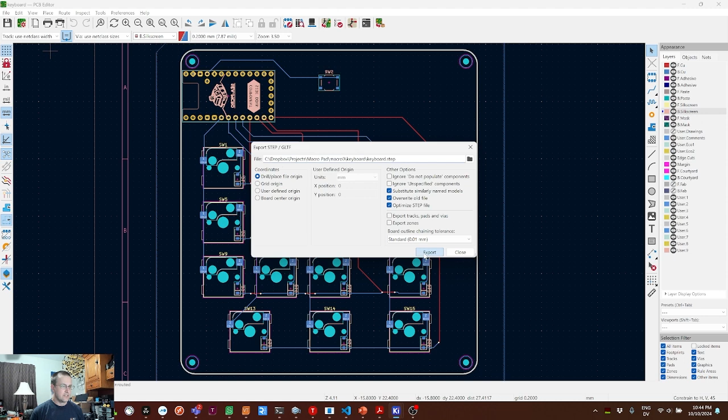Since I'm assuming no prior experience with CAD, I'm going to be using a free CAD software called Onshape, which you can find linked from the resource page. Go over to Onshape, sign up for a new account if you don't have one, and you can get started for free, and you can continue for free as long as you have a public account. The public account is really the only restriction.

Anything that you design using Onshape, anybody else has access to. It doesn't really make a big difference to me. Obviously, if you're working for a company, you probably want to get them to pay for Onshape. But the free account, I'm very happy with this as a hobbyist.

Once you have your account set up, we're going to go to Create Document. I'll give it a name like YouTube MacroPad. Now, I think the first time you do this, it will ask about your preferences, and you'll have to set units and things like that. We'll be working in millimeters here.

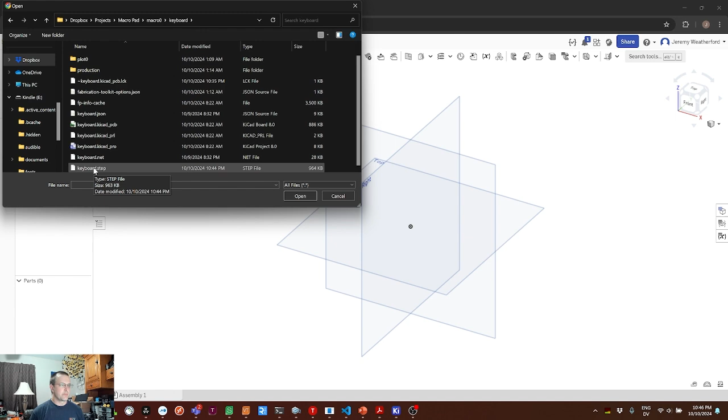It opens us up in a tab. We look down here at the bottom, called Part Studio 1. There's also an assembly tab over here. We don't want either of those. We want a new tab because we're going to bring in the step file that we have from KiCad. So click the plus sign, click on Import, and then we'll find our keyboard folder and find keyboard.step. We'll click that. Don't hit import yet though.

If you import this as is, Onshape will helpfully add a tab for each diode on your board because they each have 3D models. We want to combine these to a single part studio. So make sure you click on that and then hit import. This can actually take a minute. It'll show you the progress over here. But once it's done, it'll add a tab down here at the bottom named keyboard, which is the name of our step file. And there it is.

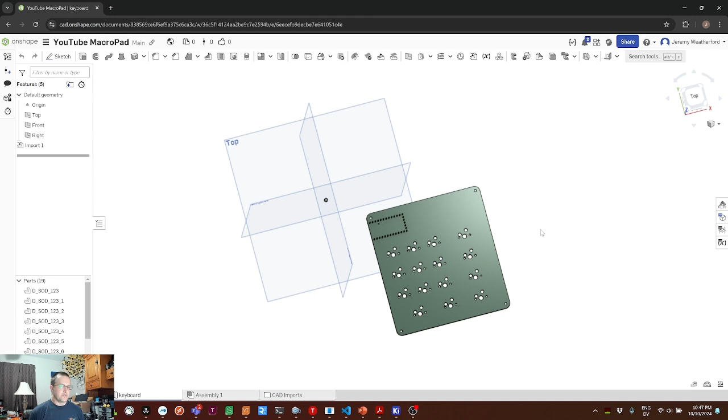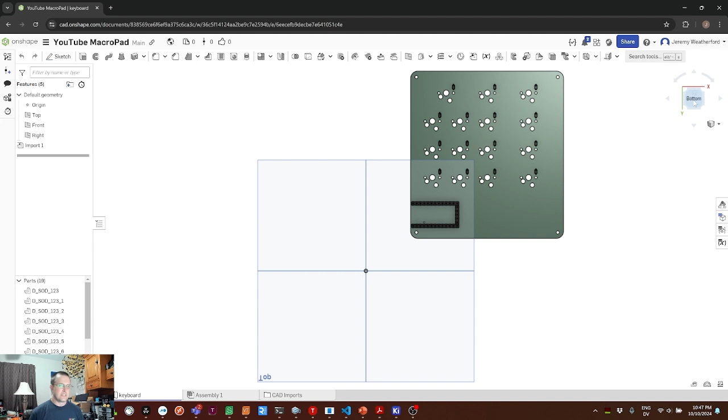This should look a lot like the 3D view in KiCad, except it doesn't bring the silk screen over. That's all right. We're just interested in the shape. As you're looking at it, you can hold the right mouse button to rotate. You hit the F key to fit the view to everything on screen. You can also use this little cube here. You can click on the top to orient to that face. You can click to orient to another face, or if you click here, it'll flip around to the other side.

So this will be the foundation for our top and bottom plate designs. Let's talk in detail about what we're going to build. And in fact, we're going to use Onshape to draw a side view of the parts we need in a little sketch. So let's come back over to Part Studio 1 for now. You right-click and rename this tab to StackUp, because that's exactly what we want to look at.

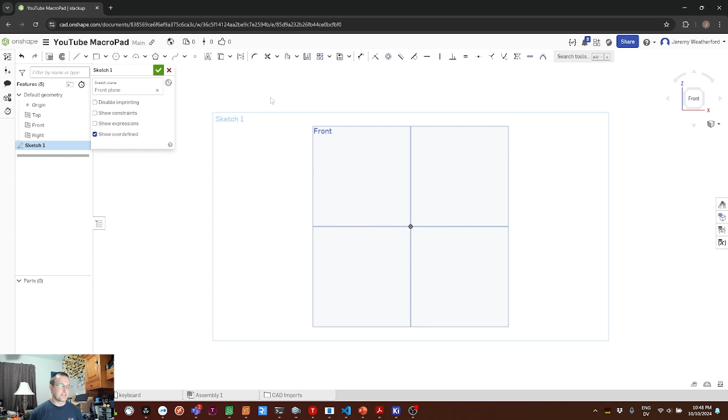Up here at the top, we want to create a new sketch, and we'll create it on the front plane, since this is a side view. And we can see the rectangle it draws here is sketch 1. We can hit N to bring us to a normal view to that sketch. Also going to hit the P key to hide the planes, because we don't really need those right now. We'll start with a rectangle to represent our PCB in the middle of the stack up.

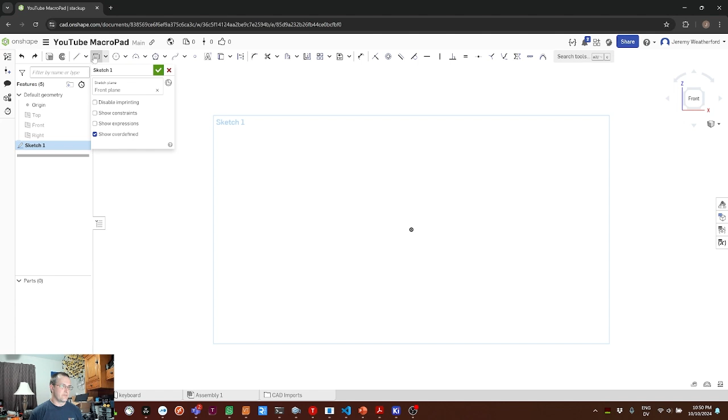Up here in the drawing tools, we have lines, rectangles. We're going to draw a rectangle defined by 2 corners. One of them is going to be the origin, so we'll click on that. And we'll drag out to the right here to make something like that. Doesn't really matter because we're going to specify the dimensions numerically. Our PCB is about 100 millimeters wide. We don't care exactly for this sketch.

And it is exactly 1.6 millimeters tall. I know that because that's the size PCB that we ordered from JLC PCB. You hit escape to unselect the rectangle. The normal cursor can be used to just click and drag these dimensions to wherever you want, or you can double click one to change it.

We're also going to draw another rectangle. We'll use G for corner rectangle. We'll draw this to represent our top plate. Mouse wheel to zoom in, click the middle mouse button to move the view. If you accidentally rotate it, you can hit N again to get back to normal or straight on view. This will be the top plate, so it'll be somewhere above the PCB.

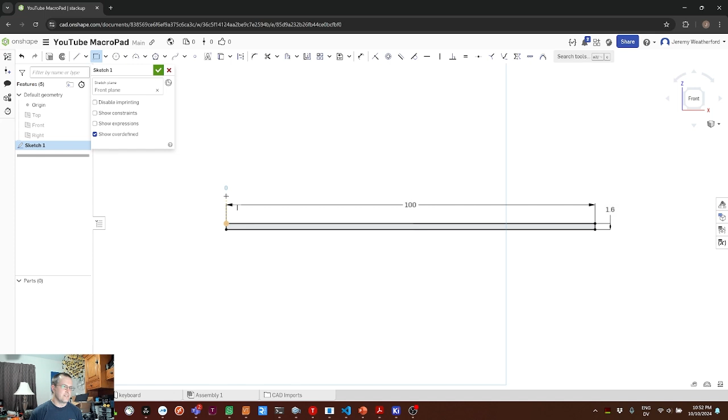If we hover over this line and drag up, we see a little dashed line that says we want to constrain it here. That'll work. And we'll drag over to somewhere around here and type in the dimensions. If the dimension you want isn't highlighted, move your mouse over to the other one, and you can type in whichever one you want first. This is going to be 100 millimeters wide, and the height is going to be exactly 3 millimeters.

Why 3 millimeters? That's the thickness of the material that I'm using. So laser cut acrylic or plywood, that's a common thickness. 3D print this in PLA, I think that'll work pretty well. This is 3 millimeters for our top plate. Now we have a space between our top plate and our PCB. How do we know how much space to leave? Well, that's going to be determined by the key switches. Our key switches are going to snap into the top plate and plug into the PCB.

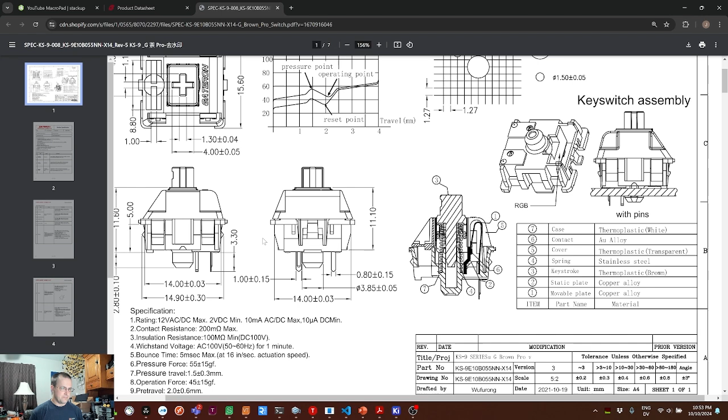So let's pull up the data sheet for our Gateron key switches. If we go back to the resource page, down here under reference information, we have a Gateron product data sheet. And these measurements are the same for pretty much any MX key switch. But as an example, we have the Gateron key switches up. And they show a couple of critical dimensions here.

The main one we're interested in is the distance from under this flange right here to the bottom of the switch where it sits on the PCB. 5 millimeters. This part here sticks through the PCB. We've already seen the hole where that's going to go, and those are the pins. But 5 millimeters between the top of the top plate, we're talking about up here, and the top of the PCB.

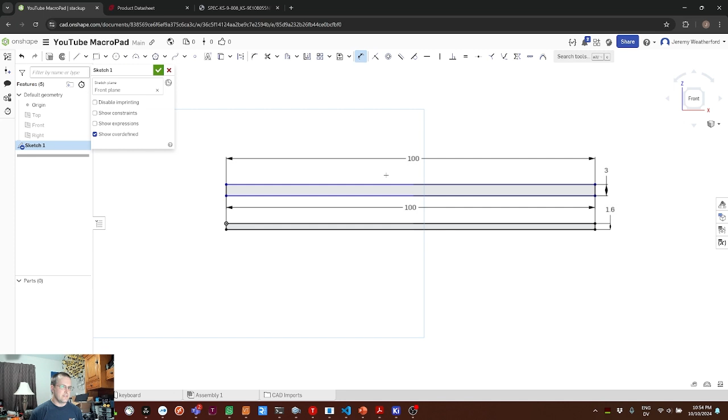To tell Onshape that we want that dimension exactly, we'll use the dimension tool, which is here, or just hit D, and we'll click the top line here, and click the top line here, and then move our mouse somewhere convenient, click again to set the dimension, we'll type 5 millimeters. 5 millimeters is going to be the amount of space between this plate and this plate. So with our material dimension at 3, we don't have to actually calculate what the spacing is. Onshape will save us that headache.

We click here, we can set another dimension. Drag over here, click. And instead of specifying it, we're just going to hit escape. So this is an informational dimension, right? 2 millimeter gap between here and here. So that's going to be the size of the spacers that we need to keep the top plate spacing correct from the PCB. We can actually draw a spacer in, hit G again for corner rectangle.

We can click here on this top line and here on this bottom line. Spacers I found on Amazon are about 7 millimeters in width. That doesn't strictly matter. And our height is already specified, so that's fine. These two lines are blue, by the way, because they're not constrained. We haven't given it a dimension for where the spacer goes in this vicinity, right? We know it's attached to these two lines, we know its width, but we don't know where it's going to be, so we can still drag it around.

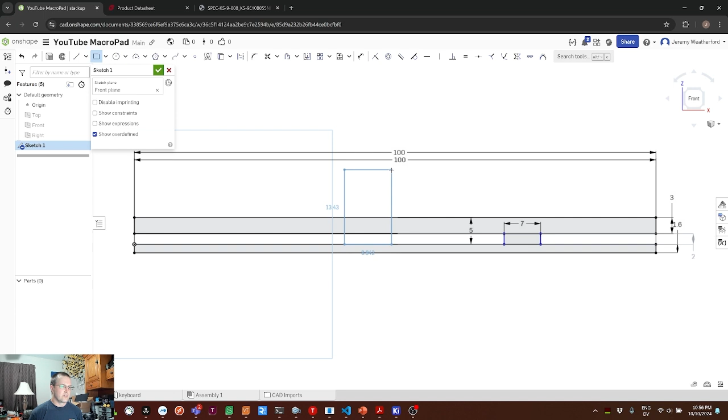So back to here, we'll draw a rectangle from the top of our PCB up through the top plate. And we'll make it about 19.

And look at the data sheet. It's about 15 millimeters wide. So we'll go 15 here, 19 here, and that'll represent our key switch sitting on the PCB through the top plate.

Let's draw in our bottom plate. Yet another rectangle. We're going to make it vertical from the origin here. And draw out something like that. We'll give it 100 millimeters wide. And we'll type 3 again for the thickness. We can create a variable for that, by the way. I'll show you how to do that a little bit later. We'll just go ahead and specify that as 3.

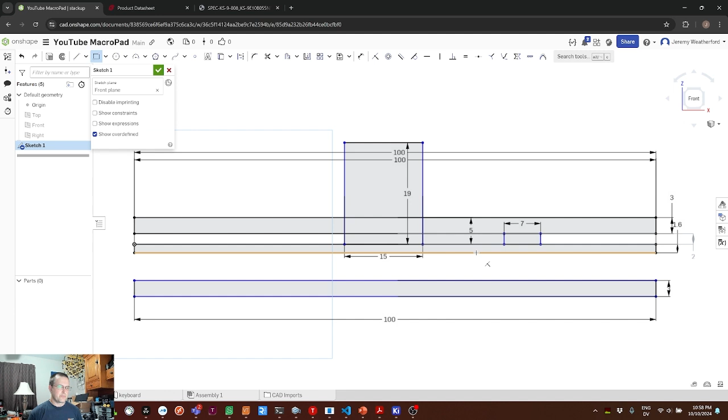We need to figure out how much space we want to leave under the PCB. We have the controller mounted down there, and if you measure the header pins, it's about 9 millimeters from where they sit on the PCB to the end of the header pin. With the board mounted component side down, the header pins are the tallest thing there. We're going to draw a rectangle to represent that space. We'll start it connected here, and connected here. And we'll give it a height of 10 millimeters to clear that.

So Onshape helpfully pushes this rectangle down to accommodate the constrained dimension here. And again, this one can slide around. We don't actually care. We're going to line it up with our spacer over here, because this actually represents a standoff. Right? These are the brass standoffs that we're going to use. You can see that there are a couple of different lengths available here, 9, 10, 11, 12, etc. These are all commonly available threaded brass standoff sizes.

All right, holding our whole stack up together is going to be a couple of M2 screws. I like the M2 hardware because it's nice and small. I like these little laptop screws with a tiny little head, so you don't have to worry about them interfering with the key switches, even if you don't countersink anything.

Instead of a rectangle for the screw, we're going to draw a line. L for line. We'll start it on the top line of this plate and drag down somewhere into our spacer. It looks like the screw could be anywhere from about 9 or 10 millimeters to, I don't know, 14 or so. So I'll drag one there, hit escape. I'll drag another one from the bottom plate up to here.

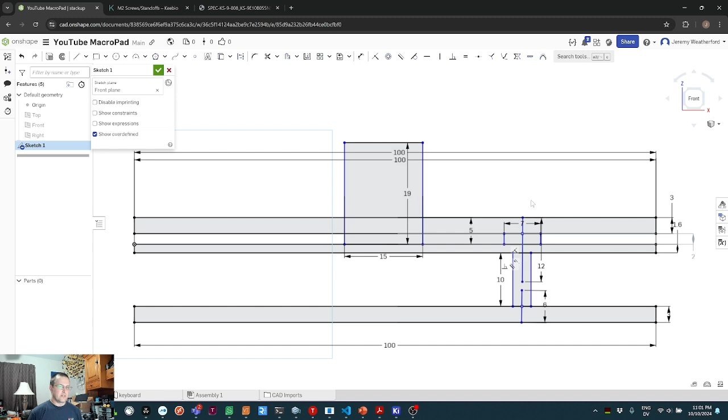Last thing I want to do with this sketch is figure out how tall our walls are going to be. I like having the top plate a little bit wider, so it can have nice rounded edges, even if it's a laser cut sheet, and then have the walls come up to meet it. So we'll draw another corner rectangle, hit G for corner. We'll connect it to this corner of the bottom plate, and drag it up to connect it to the bottom of the top plate. We'll set the width here to be our material thickness, which is 3.

And we don't want to set a dimension for the height. If we do, even if we just hit enter here, we're going to set off the red alert of over-constrained. Right? Everything turns red, all the constraints that are in conflict, and Onshape says sketch could not be solved. So that means you did something wrong. You can go in and delete constraints individually, but usually the easiest thing is to hit Control-Z. And in this case, that keeps our rectangle, but deletes the constraint that we were trying to set, which is fine.

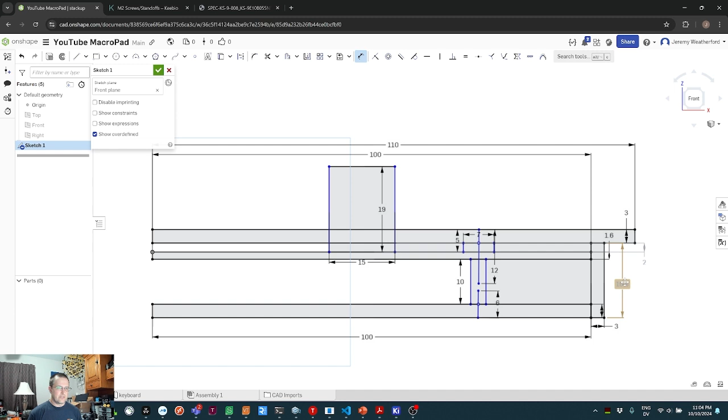If we want to see how tall this wall is going to be, hit D, click on the line, click to place the dimension, but don't hit Enter, hit Escape. Again, that's going to make this grayed out informational dimension.

If anything changes in our stack-up, like if we want 12 millimeter spacers here, our informational dimensions will change accordingly. I like 10 millimeters, that's enough room for the Sea-Picro. So that means our walls are going to be 16.6 millimeters to go from the bottom plate to just under the top plate. If you're tired of typing in the 3 for material thickness, by the way, there are other ways to set that. You can set up equal constraints to set all the dimensions equal, or you can use variables, which we'll talk about when we get to the plates.

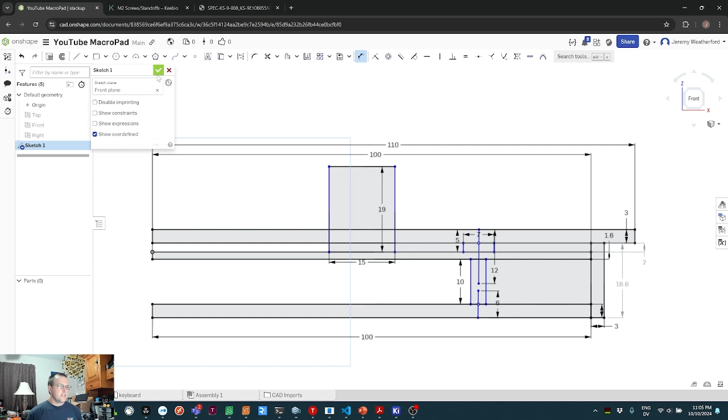Hit the green check to say that we're done with the sketch. If you wanted to edit it again, you can double-click it here in the list. And if the view is messed up, you can always hit N to come back to normal, or click on the face on the cube here. We're done with this Part Studio, though. Let's create a new Part Studio. Right here, plus, create Part Studio. And we'll right-click to rename this one as Case. We'll use this to design the top plate, bottom plate, and the side walls.

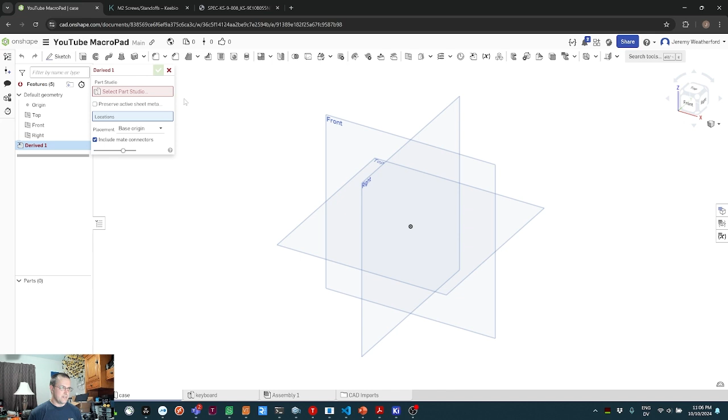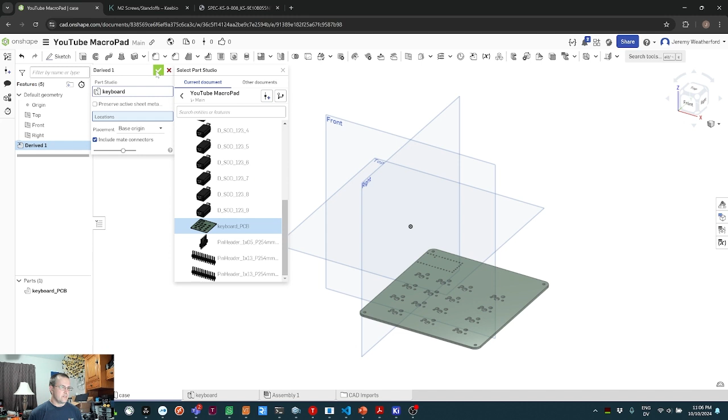Remember that PCB we imported? Now it's time to actually make use of it. Up here in the toolbar, there's an item for derived part. I'll give you a minute to find it, or you can click here and search for it. We want a derived part to bring it in from another Part Studio. And click Select Part Studio, and we want the keyboard PCB that we had earlier. So we'll click on that, and it gives us a list of options. We don't want any of the diodes, we just want the keyboard PCB. We'll click on that, and then the green check mark to commit this operation. And our PCB suddenly exists in our 3D space here.

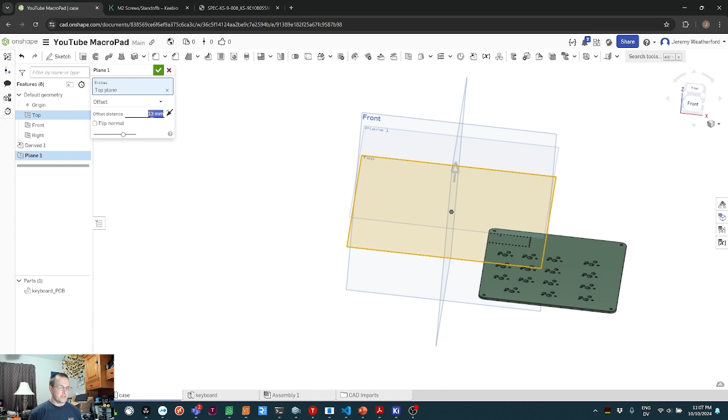The bottom of the PCB is currently sitting on the top plane. If you look at it right there, you can see that. We're going to be designing our bottom plate first, and we want it to be based on an offset plane. So we'll go to plane here to create a new one. We'll click on the top plane. That's the entity to base it on, and then set this to offset. We want it to be 10 millimeters lower, and then the material thickness is 3, so we'll go 13 millimeters lower. And if we look at our layout here, we see it actually went higher. So we'll click this arrow to flip it to the opposite direction. We go down below the circuit board. Perfect. Next to the green check, there's a little pencil icon. We can click on that and say bottom plane. And hit the green check mark.

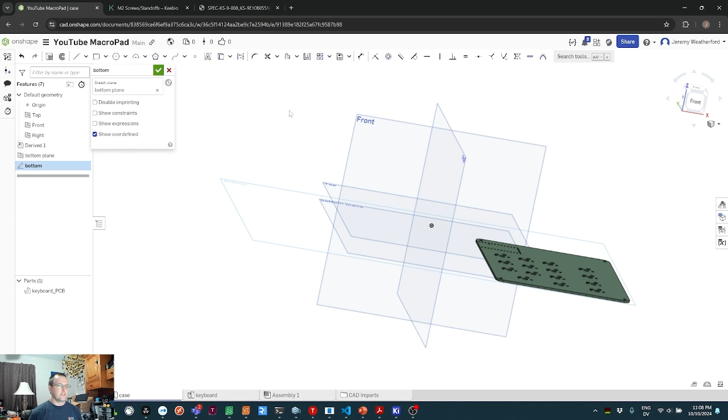Now we can create a sketch on it. Clicking the sketch button here. We'll select our bottom plane in the features list. Clicking that here. And we'll give it a name of bottom. Hit N to come back to normal. We'll hit P to get rid of the planes because we don't actually need those. Middle click drag to bring our PCB over. And we can start designing our bottom plate. First thing we're going to do is draw a rectangle to represent the inside of the walls, basically the space that's enclosing the PCB. To do that, we'll do another corner rectangle and click approximately on the outside of the PCB, click again. We have no idea what these dimensions are, so just hit escape to skip out of that.

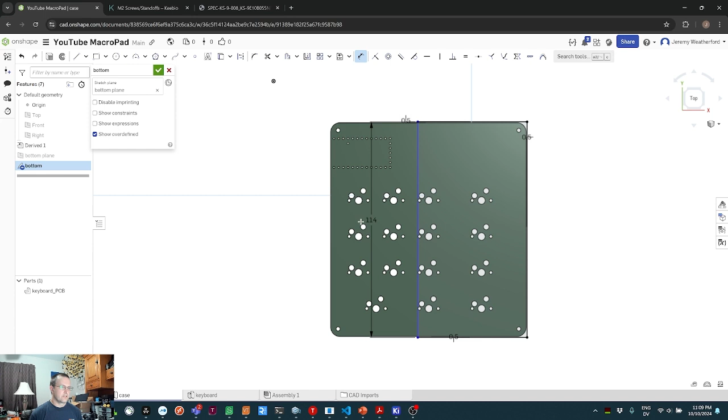And we'll use the dimension tool by hitting D. And we'll start with this top edge. Click the top edge, and click the top edge of the PCB. And we'll set that to 0.5, give us a little bit of wiggle room. Now, Onshape helpfully tried to scale the entire shape to give us that dimension, which is not quite what we were trying to do. Lines are blue, meaning you could drag them back out where they go, or we can set a negative dimension between these 2 points, meaning they should be the other way around. Negative 0.5, we'll move it out there. Same thing here. Click, negative 0.5, click, click, negative 0.5. And we have an outline rectangle around the PCB.

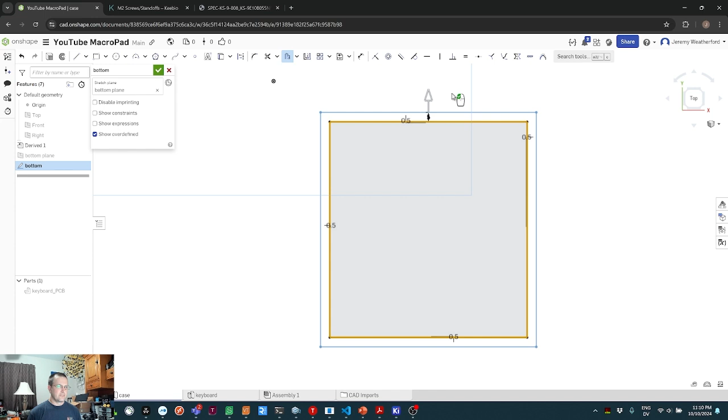We want another rectangle representing the outside wall of the bottom plate. But since it's identical to this one, we're going to make our lives a little easier by using the offset tool. I'll click that here in the toolbar, hit O, and then we'll click on these 4 line segments, say that these are the ones that we want to offset. You can hide the PCB now in the parts list over here, that way you don't accidentally click one of the lines on the PCB. And it defaulted to offsetting it inward. We want to flip it outward. And then the mouse cursor changed into this green check mark, so we'll click anywhere to commit that, and then give it an offset of 3 millimeters.

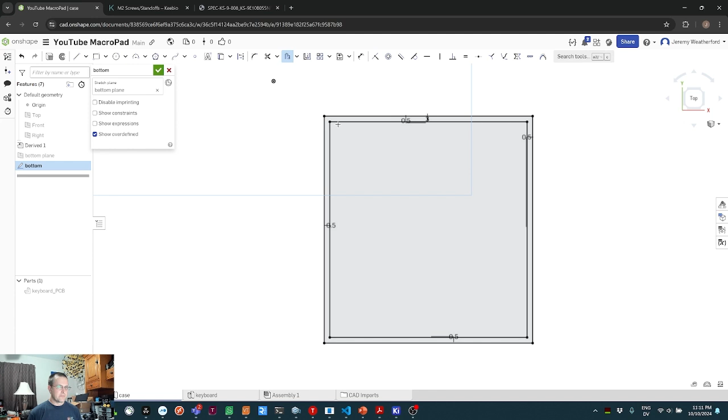We didn't offset the PCB border, by the way, because we wanted nice square corners, and our PCB has rounded corners on it. All right. If you're 3D printing your bottom plate and walls all in one piece, this is all the geometry you need to actually define that. Since I'm going to be laser cutting this, I actually need each of the walls to be its own part. We'll talk about that in a little bit.

I'm going to hit L for the line tool, click on this corner, drag horizontal, double click to end the line, and repeat for a vertical line. Middle click drag to come over to the next corner, and we'll do the same thing. If you don't like click double click, you can also click drag to draw a single line. So click drag, release, click drag, release.

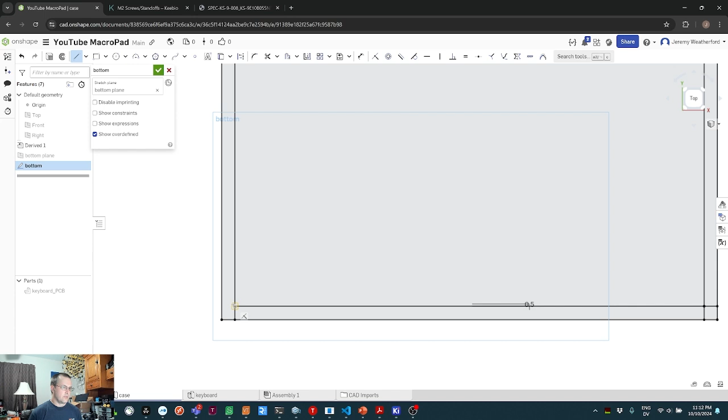Once we have all 4 of our corners boxed off like that, we have a couple more features that we want to see on this bottom plate, namely the screw holes. So over here in parts, we're going to turn our PCB back on. And in order to make use of geometry that exists on another sketch or another part, we're going to use a tool right here that says use, or you hit U, and that will let you grab something on another part or sketch and borrow it or project it into the sketch plane.

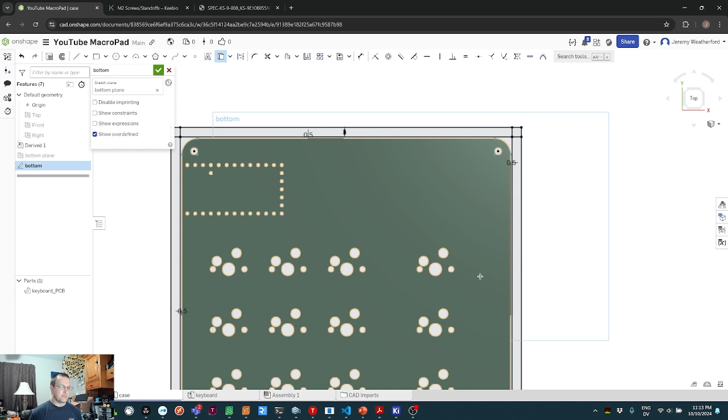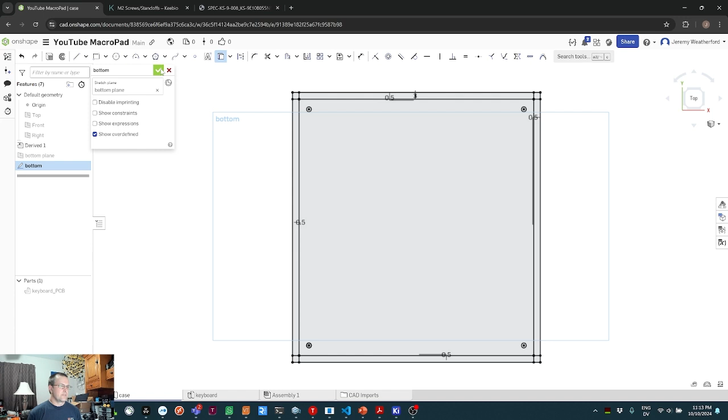So we want to click on the circumference of each of these mounting holes so that we have those in the bottom plate sketch as well. Make sure you click on the circumference and not the middle point. You can also use the middle point of a circle, but that's not what we're trying to do here. Hide the PCB again, and we see that we've successfully imported those 4 mounting holes into the sketch for our bottom plate. Now we're ready to start making parts. So we'll hit the green check mark to dismiss that.

Next to the sketch button is the extrude button. We'll click on that. Click on the sketch in the list here. And it gets pretty close. It selected the walls to extrude. We also want to extrude the base though. And we wind up with a nice slab of bottom plate with mounting holes, 25 millimeters thick. It's a little thick for a keyboard base, a little thin for armor plating, but we'll go with 3 millimeters.

I was going to teach you about variables though, so instead of typing 3 yet again, we're going to type #. It says new variable. Yep, we want a new variable. We'll do #thick. We'll hit enter. It says that's a new variable. What value do you want it to have? And it'll default to what you had there before. So 3 millimeters. We'll hit enter. We'll hit one more time to set that here. So #thick is now a variable. You can see it in our feature tree, set to 3 millimeters. If you wanted to go back later and change that, you certainly can. And you can use that anywhere in pretty much any parameter or dimension that you need to enter.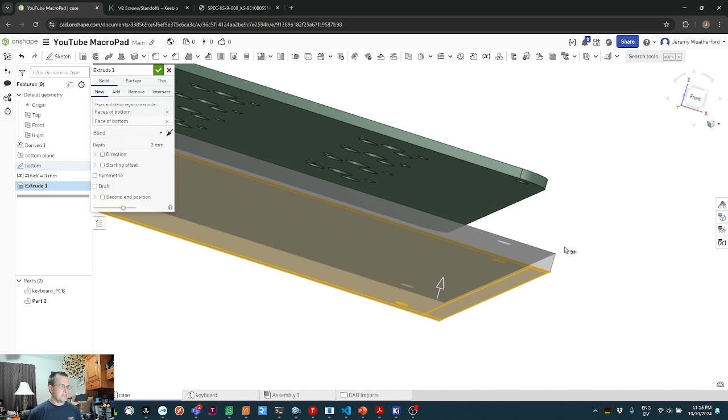Now if we rotate our part, it's starting to look more like a bottom plate. Last thing we want to do is hit P to show the planes again and make our PCB visible. We're going to double check that we went the right way when we extruded this. So we started from the bottom plane right there, and we extruded up toward the PCB. That's exactly right. We hit green check to dismiss that.

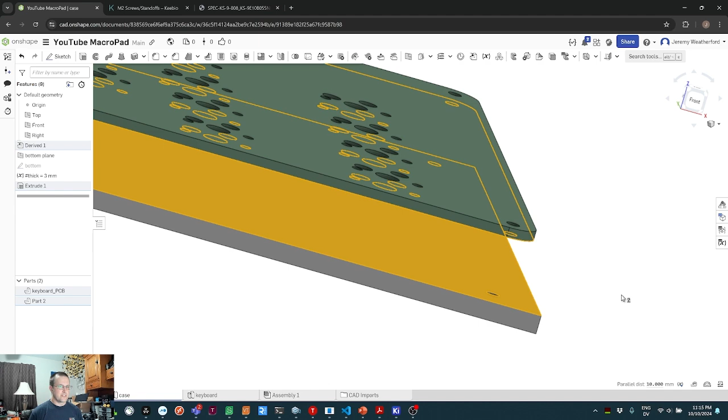And we can actually check it by selecting 2 parts in the 3D view. You can select this bottom face of the PCB and this top face of the bottom plate. And down here on the right, it'll say parallel distance between these 2 faces is 10 millimeters, exactly what we wanted it to be. That's looking pretty good. If we click on the top face of the cube here, we can even see everything lined up. Mounting holes line up and everything. Beautiful. That's starting to look like a bottom plate. We do need one more hole in the bottom plate though, and it's not for a screw.

If you have a reset switch on the back side of your PCB, you might want to be able to push it without completely disassembling the keyboard. Or not, that's your call. If you do want a hole though, we'll double click on the bottom sketch here, N to bring it normal, hide the PCB to get it out of the way, and we want a new circle.

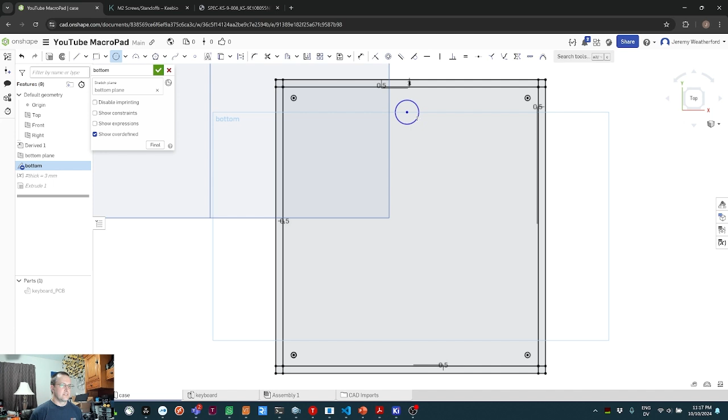So we'll hit C for cookie, also for circle, and we'll click, I don't know, somewhere around here, drag it out, click again, set the diameter, 2.2 millimeters, big enough for an M2 screw. It'll work fine for a reset hole. Hit enter, and we have a circle. Hit escape to go back to the cursor. The circle is blue, which reminds us that we did not tell Onshape where the circle is.

Now, unfortunately, our PCB doesn't have any clues. There's nothing on here to indicate where the reset switch is, since it didn't have a 3D model. So we'll need to base the location of this hole off of something that we can find on the PCB. Like, how about this mounting hole? We go back to the PCB editor. There's a tool over here on the right, which is made for finding dimensions like this, the measure tool.

We'll click on it. We'll come up here to the center of the top left mounting hole. And when we try to drag down to the reset switch, we see that it's still snapping to 45-degree angles, so we'll hit Shift Space to turn that off. And now we can click right in the middle of the reset button, and this will stick on the screen for us. It gave us a little pop-up here that gives us the as the crow flies distance, which is not super useful. Also gives us an X and Y distance, which is exactly what we need. So 49 millimeters X to the right of the mounting hole, and 7.4 millimeters down.

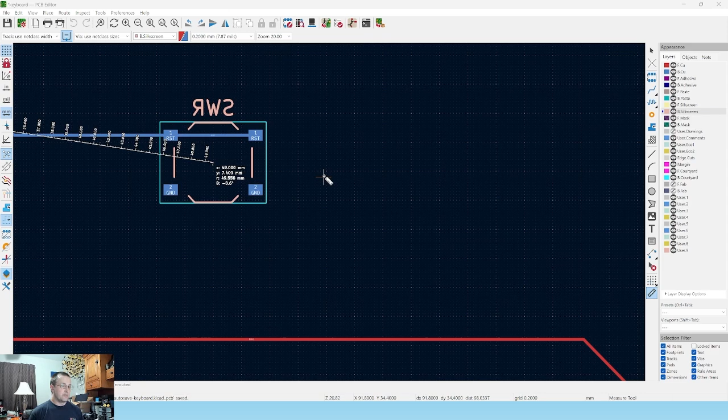We come back to our Onshape file. We can add a dimension with D from the center of the circle, with the center point, not the circumference. Drag over to the center point of our reset hole, click. We can set the as the crow flies dimension, or if we move up a little, we can set the horizontal dimension, or if we move right here, we can set the vertical dimension. So as long as we set two of those three, it'll exactly specify where this goes. I'll stick with horizontal and vertical.

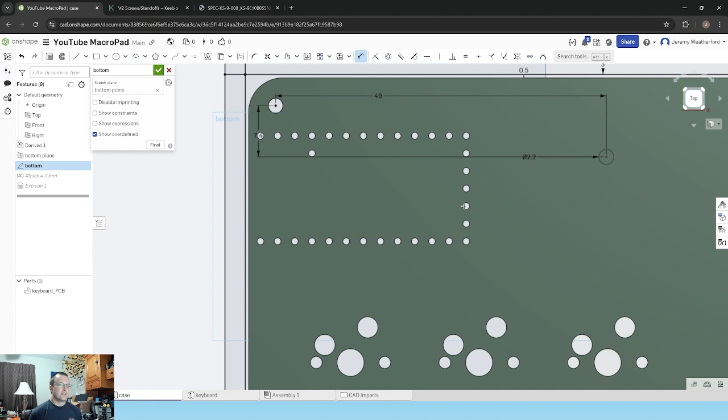49 millimeters horizontal. Click, click. I'll move this over here to set 7.4. Enter. And our reset hole is definitively located. Double check. 49, 7.4. Exactly where it should be. The green check to exit the sketch. Hide the PCB. And we see that our extrude defaulted to not filling in that hole.

If it made the wrong call for some reason, you can double click on the extrude here. And where it says faces, you can go in and toggle that face on or toggle that face off to include or not include it in the extrude. While we're here, we'll go and rename this as bottom plate. And in our parts list down here, we can also give part 2 a name by right-clicking and selecting rename. This is our bottom plate.

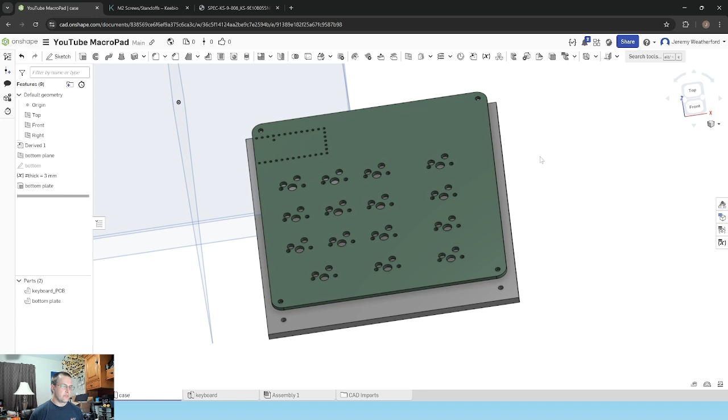Turn on the PCB to show the stack up again. F to bring it back to the visible area. And our stack up is looking pretty good. I think we're ready for a top plate. It's going to look very similar, only with more holes for the key switches. We'll start a new sketch from this button. Select the top plane in the feature list here. And we'll give this a name of top plate.

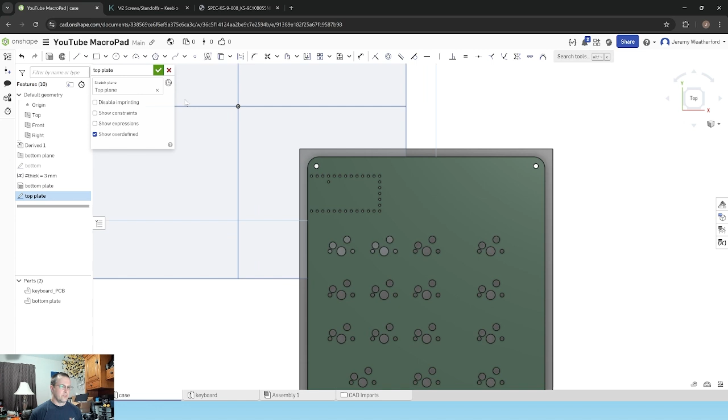N to bring it normal. We're going to hit P to hide the planes. And we're ready to start bringing in some geometry. The bottom plate is a little in the way here, so we can hide it from the parts list. And we'll create the outline for the top plate. I don't mind having rounded corners, just like the PCB. So I'm going to use an offset.

And instead of clicking each of the segments of this, we're going to right-click and say Select Tangent Connected Edges. And then ignore this for a second. It's mad about trying to flip this inward. But if we click this arrow to flip it outward, we're just fine. Click again to commit it, and we'll set the offset to 8 millimeters. Should give us a nice size top plate.

We want to make sure that the square edges of the walls fit nicely under those rounded corners. We can turn the bottom plate back on to see that. That looks good to me. If that's not the shape of your dreams for some reason, you can always draw your own outline, dimension it off the PCB. And if you like rounded corners, you can use the Sketch Fillet tool here. Click on it, click two line segments, and you get a radius here that you can specify in millimeters.

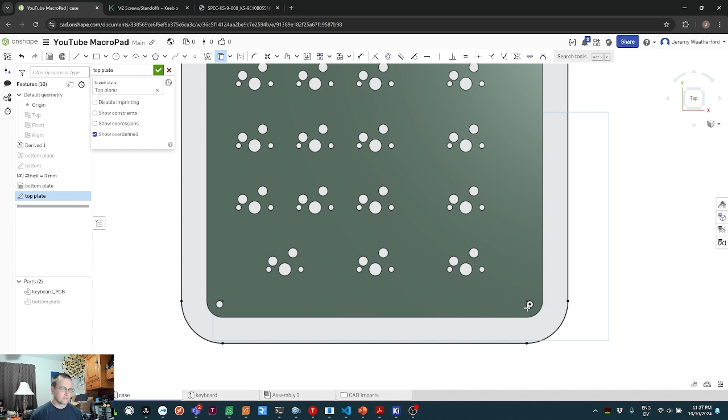I'm happy with the rounded outline of the PCB. We're definitely going to need those mounting holes. So if you'll remember, U for use, and we want to grab the circumference of the mounting hole, not the center. There we go.

And the other type of hole that our top plate is going to need is for the key switches. If we go back to the Gateron datasheet for a minute, we can see right here that the dimensions of the key switch that are supposed to fit in the cutout is 14 millimeters this way and 14 millimeters this way. So we need a 14 by 14 rectangle. You're very familiar with the corner rectangle tool, so you might be inclined to grab that. But we want this particular rectangle to be centered on this big hole for the center post of the key switch.

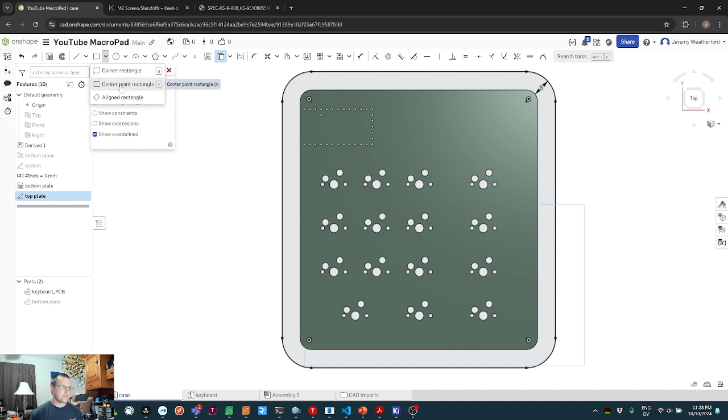So instead of corner rectangle, we're going to grab a center point rectangle, which is the one that gets the R hotkey. And our center point is going to be the center of this giant hole, which, you can see, is an anchor point. We'll click there, drag out, click, and set our two dimensions, 14 millimeters wide, 14 millimeters high. And there's the outline for our first key switch hole.

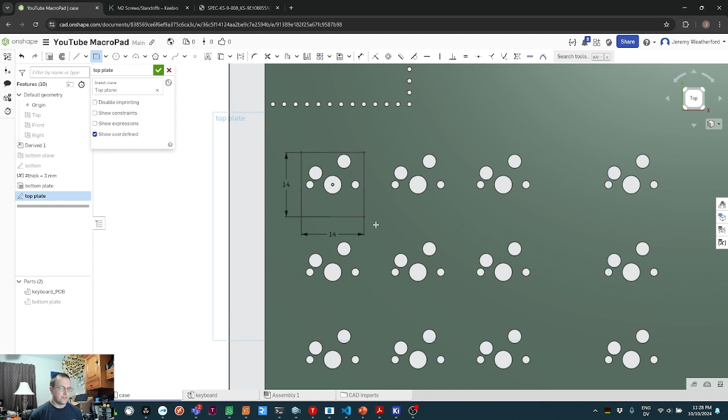For this MacroPad, you can do all 15 of them, probably faster than I can teach you a linear pattern. But just in case you're doing the 12 by 12 Mondo pad, we're going to do a linear pattern anyway. You'll find that up here in the toolbar. You click on it, and then we'll click the features that we want to duplicate, which is all four sides of this square. And by default, we have 3 copies of it going this way with a 25 millimeter spacing, and 1 copy of it going that way. We can click this arrow to flip this direction down, and we can double click this to set the number to 3, and we've got a 3 by 3 grid, which is not at all aligned with our key switches.

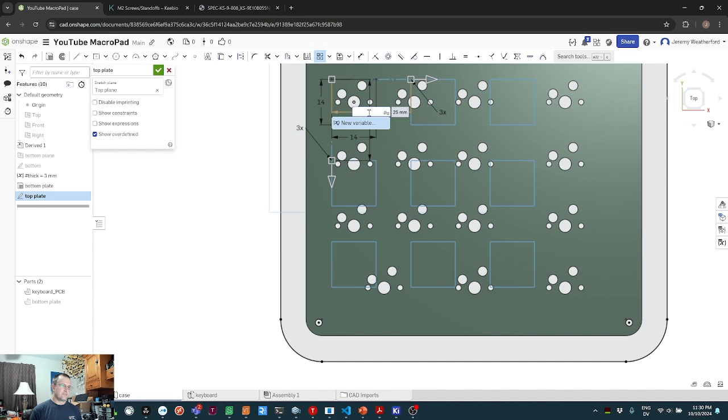Now you could use the dimension tool to check the spacing from this hole to this hole, but I happen to know it's exactly 19.05 millimeters. That magical number is also known as 1U. When you talk about a 1U keycap, that is the spacing. 2U is twice that. So we can double click on this dimension here. Instead of typing out that number, we'll give it #U and type in 19.05. Enter, enter, enter. And the horizontal spacing is looking pretty good. Double click on this dimension, #U, and there we go.

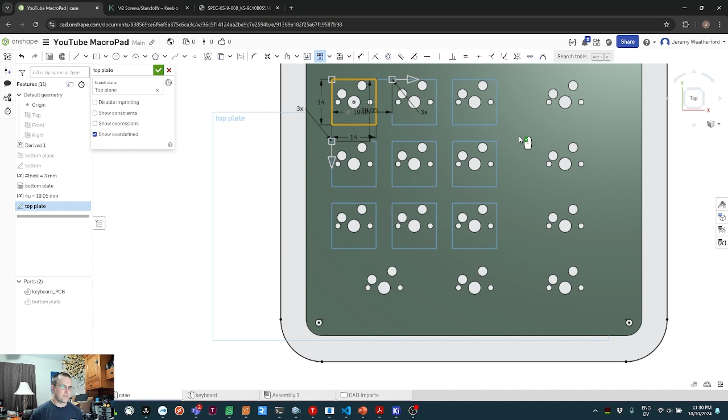All right, that linear pattern is looking pretty good. And those are the only ones in a regular spacing here. So we'll click the left mouse button to commit this linear pattern operation. We can do one more over here because these are all in a row. Our center point rectangle will be centered here, 14 by 14, with a linear pattern using all 4 sides. This time we only want 1 in this direction, and 3 in this direction, with the same 1U spacing as before. Oh, that looks like 4 in that direction.

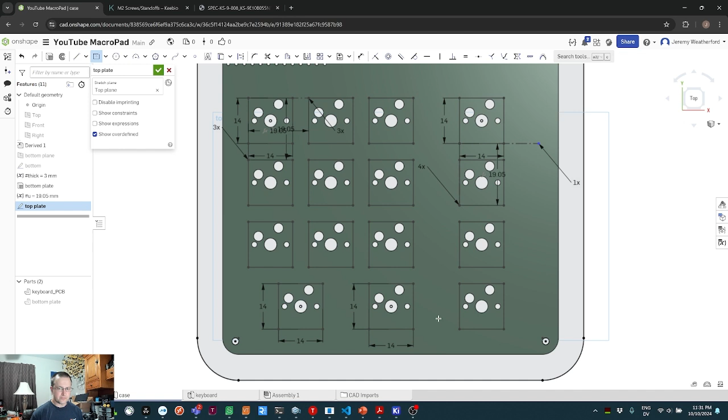Finally, we'll do the last 2 oddballs here with a regular center point rectangle. Hit R to start the rectangle tool. Click the center point of the circle, drag out, click, 14, 14. And that's all 15 of our key switches. We'll confirm the sketch, start an extrude operation. And over here in the features list, we'll click on the top plate as the thing we want to extrude. That's a little thick by default. We can set this to pound thick.

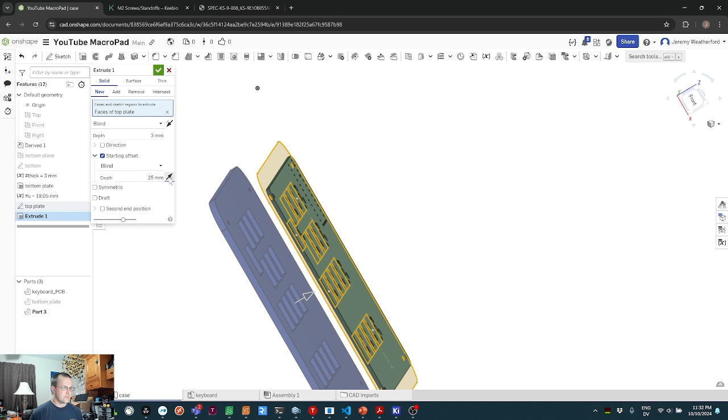And we get a 3mm plate. Now you'll notice that it's extruded right through the PCB because they're both sitting on the top plane. We're going to give this a starting offset. We want to move this up, which is that direction, right? Nope. That direction. We're going to move it up. From this plane, we want it to be 1.6 plus the magical 5mm between here and there. 1.6 plus 5. There we go.

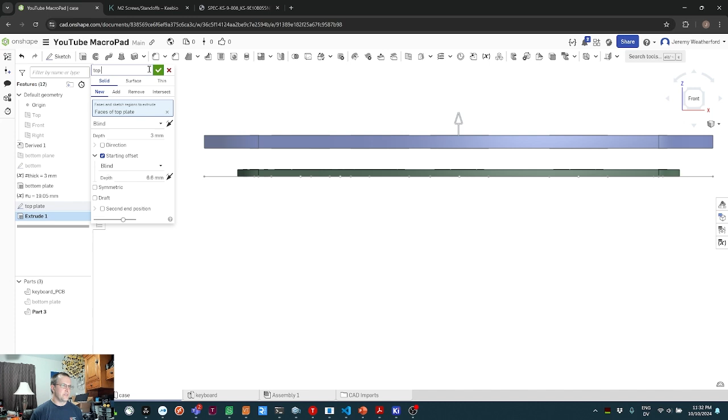We'll name that top plate. The green check to commit it. And just to be safe, we can measure between that face, and we should get 5mm. I don't think that's right. We should have 5mm from here to the top face of this.

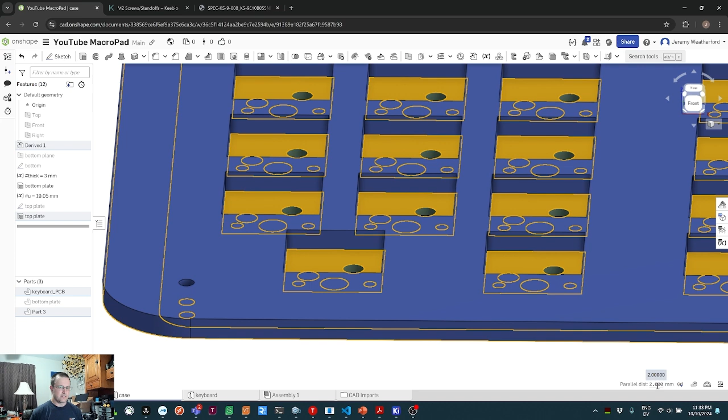So let's double click on our extrude. We want our depth here to be 5mm to the top of this plate. So we'll subtract 3mm, bring it back down. There should be exactly 2mm between these two faces. One there, and one there. Parallel distance, 2mm. That looks better.

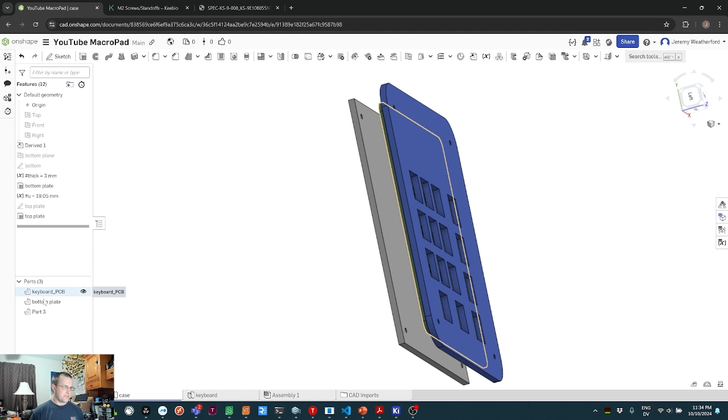We can hit N to bring it back to normal view. We can turn on our bottom plate. And we have complete stack up here. You click again on blank space to deselect whatever's selected. One more thing to do in our parts list here, we'll click on part 3, hit Shift N to rename it, call it top plate.

That is a functioning keyboard, but it's a little breezy, so we're going to put some walls on it to make it look like a finished product. To start with, we will go over to Extrude, and our bottom sketch is probably hidden, so we'll click on the visibility button here to show it. Click the top face of the cube to bring it normal, and we're going to hide these parts so they're not in our way.

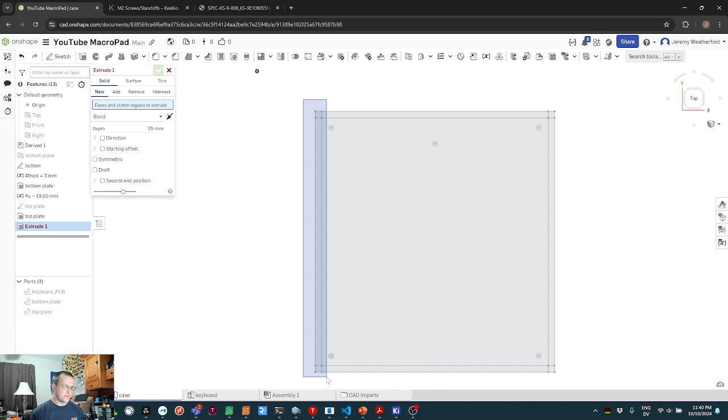If you were 3D printing this case, you might want to attach the bottom plate to the walls and print them all in one piece. That would work fine. I'm going to be doing this as a laser cut, so I want these as separate parts that can have finger joints between them. So for that reason, I'm going to only extrude the 2 vertical walls, dragging a box around these 3 faces. And I'm going to make sure this is set to new rather than adding it to an existing part.

The height we want for these walls, we figured out earlier, is 16.6mm. So we'll put that in. We'll call these vertical walls. The green check mark. And we'll extrude again. The top face to bring us normal again, and we'll drag a box around these 3 and these 3.

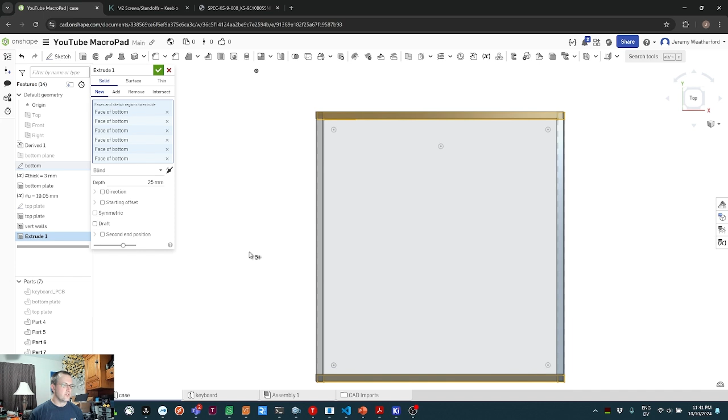Now, since we had other parts visible, it picked some of those up in the face list here. So you can see rather than just trying to extrude faces of the bottom sketch, it's also trying to extrude parts of the vertical walls. We can just click the X here to get rid of the parts that we do not want in here. There's our vertical walls. We could put the height in here again, or we can say up to face, and click on this face of the walls, which means they'll always match. These are our horizontal walls. We can check.

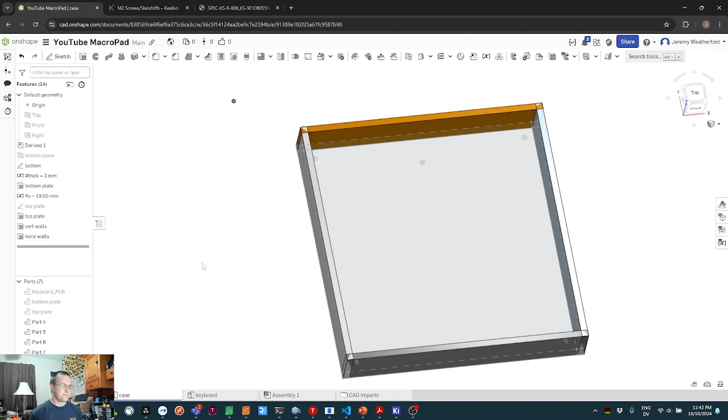Down here in our parts list, we can see that these parts are actually separate. If we'd chosen to add them to the bottom plate, they would all be one part called bottom plate. But now we have parts 4, 5, 6, and 7. Click 1, hit Shift N, call that wall 1, click again to unselect it, click the next one. We can see that these parts overlap because of the lovely flickering effect that we get here. That's exactly what we want for laser cutting. We'll be cutting out finger joints in those parts later on.

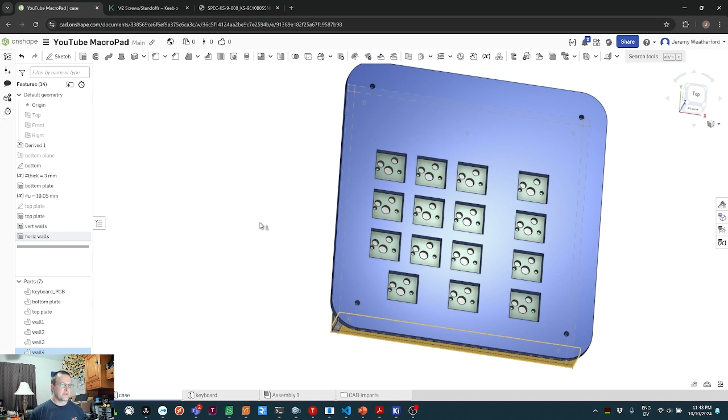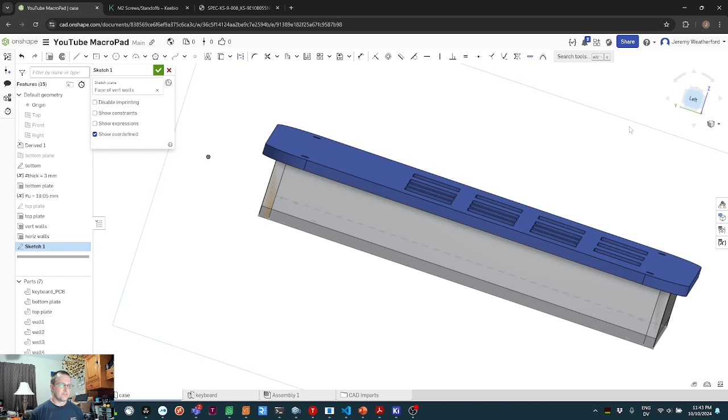We would be done if this was a Bluetooth keyboard, but since we have a USB port, we should probably make a place to plug it in. In order to cut out a notch on this part, we're going to click New Sketch, and rather than an existing plane, we're going to click this face of the wall, and it'll happily add a sketch to that face. Bring it normal like usual. And we'll hide some of these walls because they're in our way. Wall 1 specifically is the one we're trying to cut a hole in.

And we need to figure out where to line up the USB port, because that's going to be sticking off the bottom of our PCB right here. We pop over to KiCad, we can use our measure tool, find a dimension from, let's go from the top edge of the board. We got about 11 there, about 21 there. Now we don't want to cut it too close because the plastic surrounding a USB connector is going to stick out the sides. So let's say we make that more like 9 and 24 looks good to me.

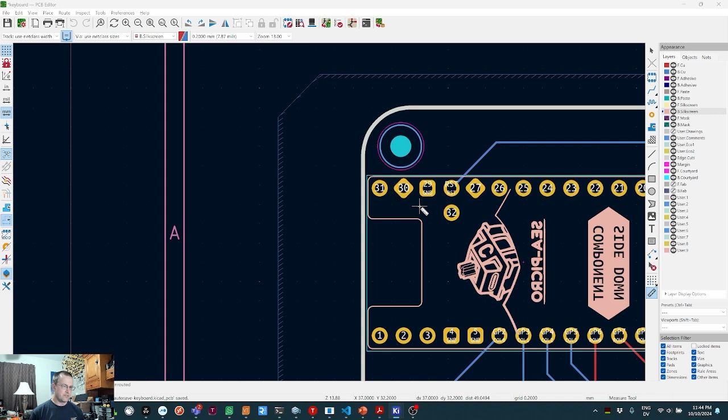We'll draw a corner rectangle using G to describe our notch. It'll be attached to this bottom edge of the PCB, so drag it out this way. Don't know what the dimensions are yet, so we'll just hit escape. We did measure our dimension from this edge to the edge of the PCB. So click there, give this a horizontal value of 9. And we have a dimension from here to the same point, which would be 21.

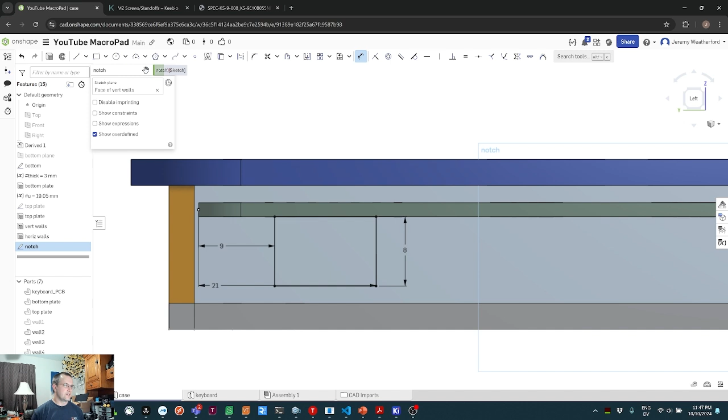We'll give it a height of 8 millimeters, so plenty of room to access the USB port. Remember, the whole Sea-Picro is about 9 millimeters tall, so that should give us plenty of room. All right, we'll rename this to notch so we can find it later. Green check, extrude, and we'll select our notch sketch. This time though, instead of adding a piece, we want the remove operation.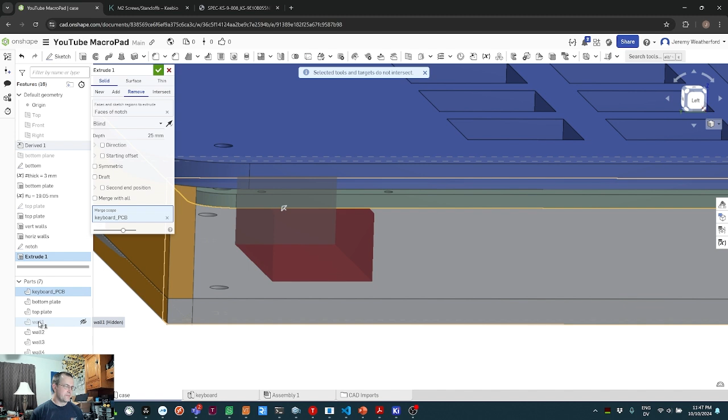And it's trying to merge it with the PCB, which is not going to work so well. The merge scope here that we want is with wall 1. We'll click on it, get rid of the PCB. And if we show wall 1, we can now see that we're putting a notch in it, sure enough. And this notch is aligned with the bottom edge of the PCB, right where our USB port is going to wind up. We'll give that the name notch. Green check. Looking a little square though.

We'll use the fillet tool here to make it a little snazzier. Click on fillet, and then we're going to click on each of the line segments that makes up the inside edge of this part. Right, that segment, and that segment, that segment, and that segment. We can set a radius here. Let's say 3 millimeters, I think.

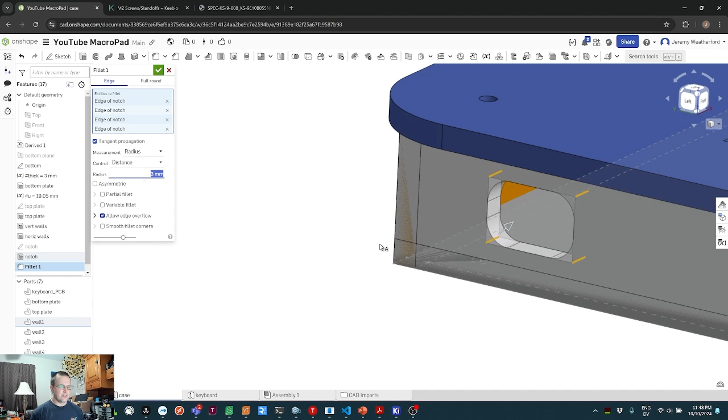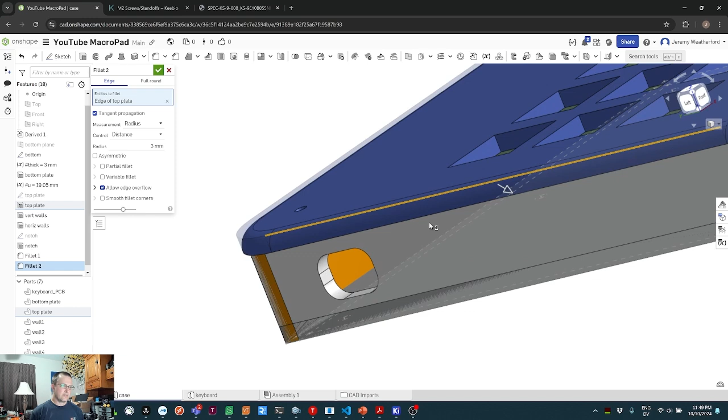Perfect. If you're 3D printing this, you can start exporting STL and printing parts. Don't forget you can add some more fillets just to make it fancier, and because you can show off to those poor chaps who have to laser cut flat parts. To export a part, you just right-click it here in the parts list, export, and for the format, you can either go STL, which is pretty common, or STEP. Some slicers take STEP files as well.

You can even select multiple parts and export them all together as an STL. You can even export, if you're waiting for your PCB to come in, your PCB and do a test fit with everything and see how it works. Someday we'll be 3D printing actual circuit boards, but not yet.

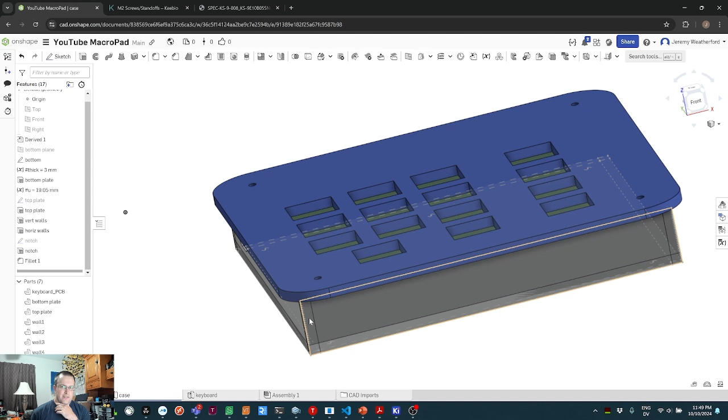For my laser people, we need some finger joints to fit these parts together. To add our finger joints, we're going to make use of a custom feature of Onshape. Find that in the icon right here at the far right of the toolbar, Add Custom Features. We'll click on Community Spotlight. And in the search field, we'll type laser joint. Enter, come down to FeatureScript laser joint, and we can click on this FeatureScript right here, and it says it is added to our toolbar.

We'll click to close that, and now we have a drop-down here with a feature called laser joint. Click on that to add it to your feature list. If it has single selected here, we'll go to automatic. And we want to join parts from our list over here. We'll select the bottom plate. Wall 1, 2, 3, and 4.

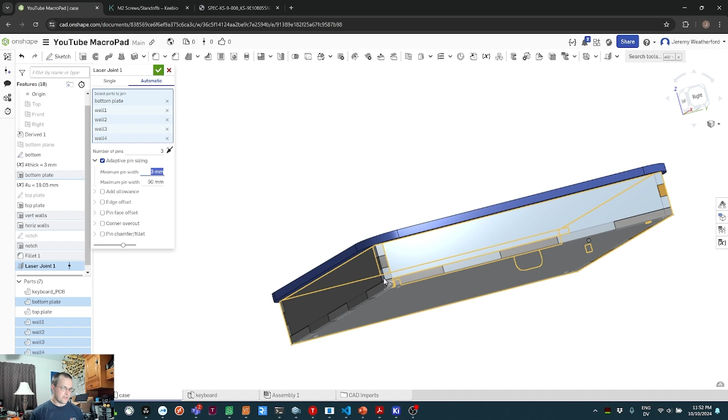And by default, it's trying to put 3 pins in everything, which looks a little tight to me. So instead of setting this to 3, we're going to use adaptive pin sizing. With a minimum width of 3 millimeters, we get 1 pin in each of the walls. That looks good. And a maximum of 50 millimeters, we get a couple of pins in the bottom joints. You tweak that to your heart's content, and then hit the green check mark to commit it.

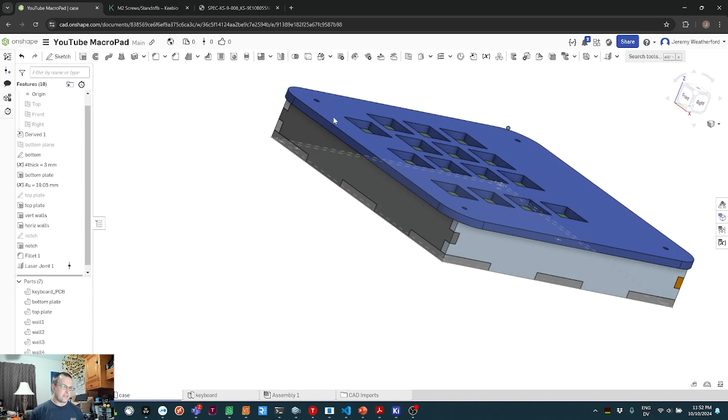For extra credit, you can add tenting feet to the back of the case. I'm not going to cover those here because the script is already over 15,000 words long. We're going to move right into exporting this for laser cutting. We'll make use of another custom feature here. We go to the Community Spotlight, we'll search for Auto Layout. And FeatureScript Auto Layout, click it here. Close out of this. From the drop-down, we'll do Auto Layout.

And it's going to look for all the parts with a certain thickness. Well, our material thickness is pound thick, so we can put that in here. And it's going to lay them out on a virtual sheet with certain dimensions. Doesn't really matter what those are right now, but you can see it's flattened all of our parts out to get ready to export them. With the green check mark here.

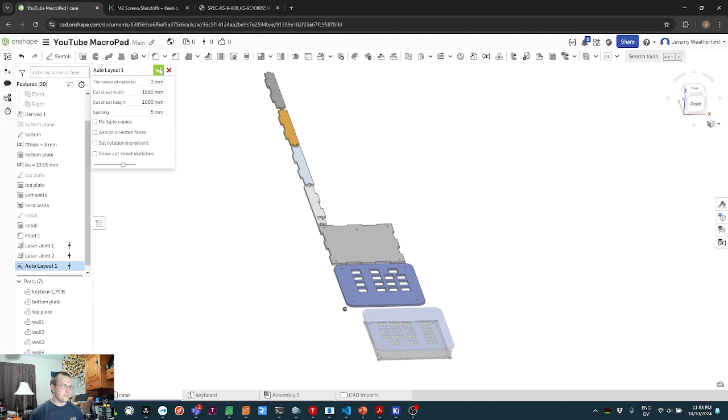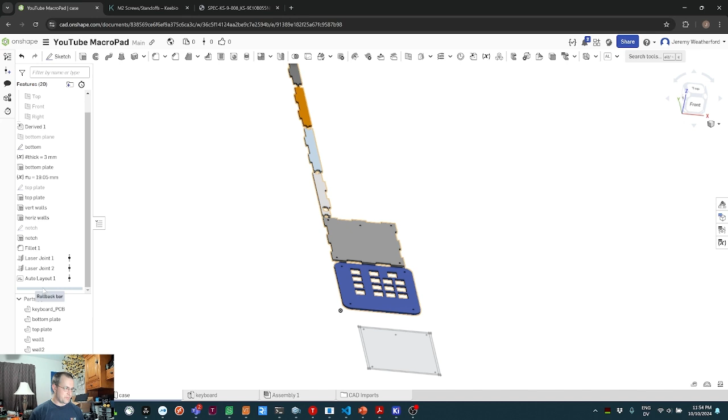This is a fairly destructive operation in the sense that it's completely rearranged our parts, but we can still go back at any time and edit a dimension or sketch or anything else. In our list of features over here, down at the bottom, there's something called the rollback bar. And if we want to go back to a point in time, let's say when we were extruding the walls, but before we put the notch in, we can drop the rollback bar right there. And we can see that our parts are all back together with no laser joints, no notch in the wall yet. We can edit any of these parts, and then when we're done editing, we can drag the rollback bar back to the bottom.

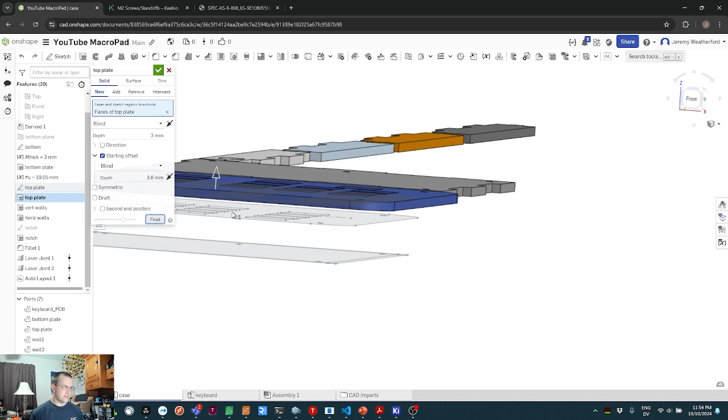The same process is actually what happens anytime you double-click on a feature to edit it. You're rolling back in time to that point in the process, unless you click on this button here that shows Final, which will give you the end result after all the operations.

Last thing we want to do before we get ready to export this is if we hit the F key, we'll see an odd little part over here. That's our PCB. It's not 3 millimeters thick, so Auto Layout didn't try to move it. But our CAM software is going to try to give us an outline for it unless we get rid of it. So we'll go up here to Delete Part. Now this might seem kind of destructive. We're going to click on the keyboard PCB to delete it with the green check mark, and it's gone.

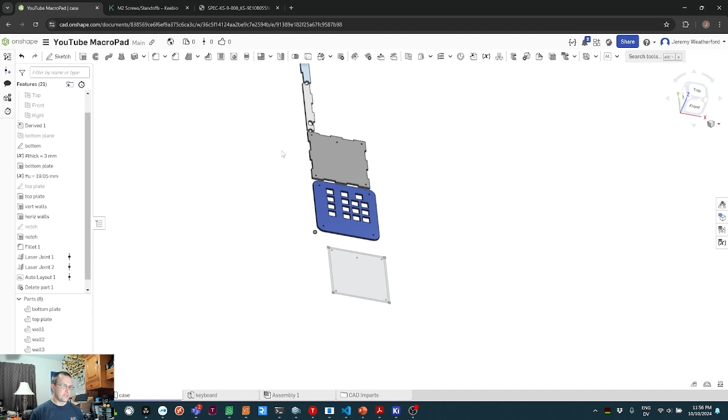We didn't delete it completely though, because over here in our feature timeline, we still have the derived 1 part, and it doesn't actually get deleted until the very end here. So all of our references to mounting holes and outlines and everything else on the PCB are still perfectly fine. The only thing we really deleted is the part from our final layout.

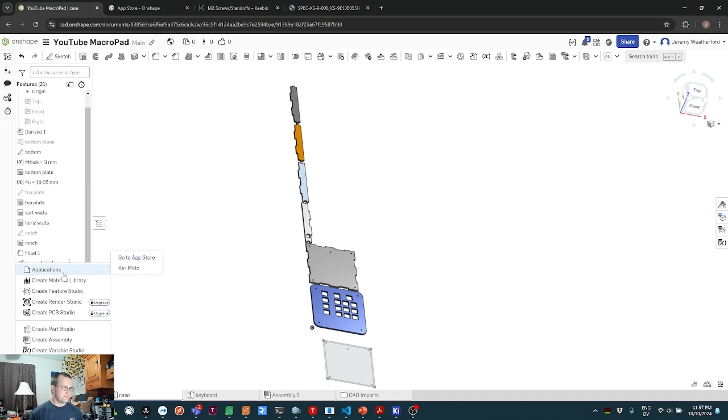Easiest way I've found to export for laser cutting is a CAM application, which we can add from the plus sign here, applications, called Kiri:Moto. If you don't have this installed, you can go to the App Store, type in Kiri, that's the one. You can install it, it'll ask for some authentications, everything's free. Now we can go to plus sign, applications, and add a Kiri:Moto tab to this document.

In the Kiri:Moto tab, before we get too far, we're going to go up here to the mode dropdown and select laser. By default, it opens up the files import window over here. We just want to enable the button that says Part Studios. I'm going to bring in the entire case Part Studio. Click on that. We do want to group these parts, so we'll hit OK. And there's the top plate, bottom plate, and wall pieces. Not very well optimized for laser cutting.

One very important setting over here is the kerf, basically how much material the laser beam is going to remove. If you have access to a laser cutter, hopefully you already know what this should be. If not, you may need to make a couple of test prints with finger joints. If they're too loose, it means your kerf setting is too low. If they're too tight, it means your kerf setting is too high. For SendCutSend, though, we want this to be 0 because they do their own kerf correction.

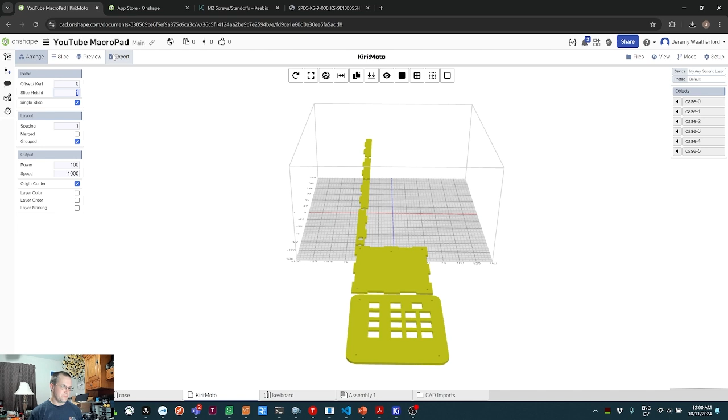We'll set that to 0, come over to the Export tab, and SendCutSend wants a DXF, so we'll download that. If you have your own laser cutter, you might want to export an SVG. I know that works well in LightBurn, or Kiri:Moto can even generate G-code for a laser cutter.

Let's see how to order those parts from SendCutSend. Open that up from the resource page, and we'll click on Get Started, and browse files to select the DXF file we just downloaded. Give it a second to think about it. And sure enough, that's what we just exported. We've got mounting holes, reset hole, key switch holes, USB hole. Everything's in millimeters, that's right. We'll confirm.

Select a material. I went with plastic, acrylic, black. Depending on which color you pick, the price is a little different. Definitely want 3mm material though. That is the thickness that we designed for in Onshape. And this should come to about $20.

The PCB is on order. Your cases and plates are on order or ready to print or cut. Once you have all the parts on hand, you're ready for part 4 of the series.